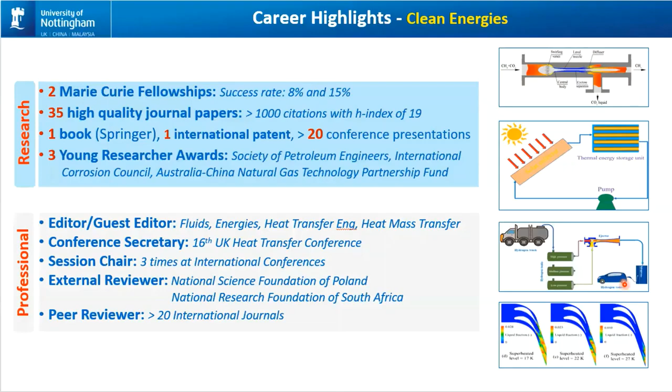Now let's have a look at the phase change material for thermal energy storage in solar-based heating systems.

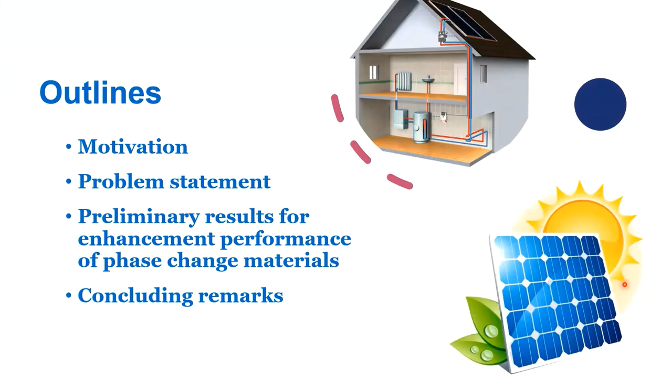As far as we know, climate change is one of the main concerns for our current society, not only for our academic colleagues, but also for the general public. Extreme weather is becoming more and more frequent in recent years. For example, we had floods in Europe and China this July.

To combat climate change, on one hand we need to develop new technologies for the sustainable development of fossil energies. On the other hand, we need to increase the utilization of renewable energies, including wind energy, solar energy, hydrogen, geothermal, and so on.

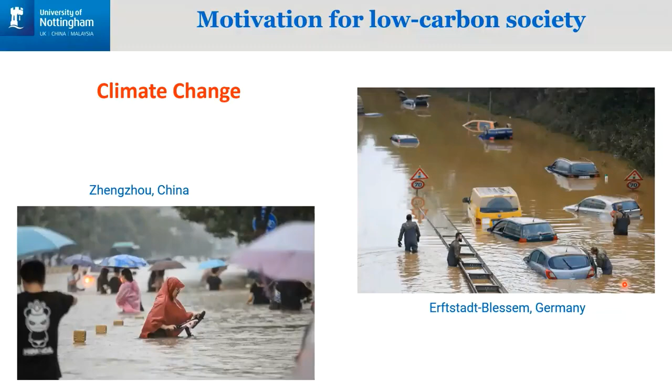This figure shows the CO2 emissions from different sectors in the UK, and we can see that emissions from homes and communities rank in the top three in the UK. For this purpose, we have to develop and increase renewable energy to mitigate CO2 emissions from our buildings.

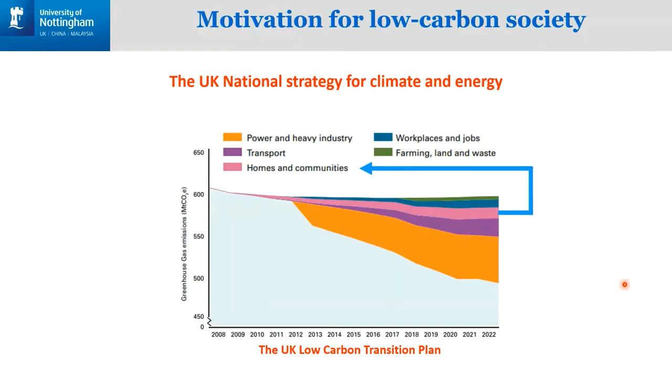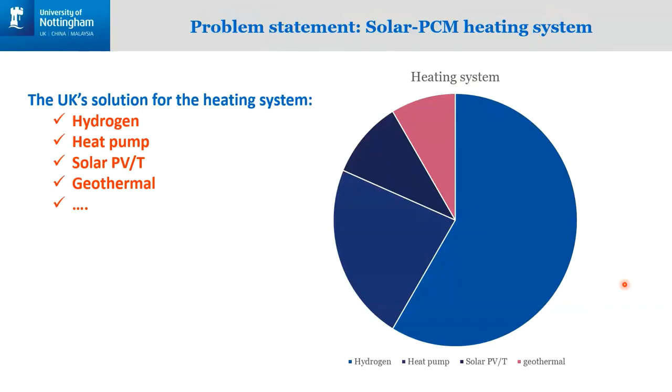For the UK, we have the following solutions for heating and cooling systems. For example, we will try to increase the utilization of hydrogen, heat pumps, solar, geothermal, and other new technologies. For this purpose, we try to integrate phase change materials as thermal energy storage with solar energy, to upgrade the energy efficiency of the built environment. This method will not only improve the energy efficiency of the modern building environment, but also mitigate CO2 emissions from homes and communities in the UK.

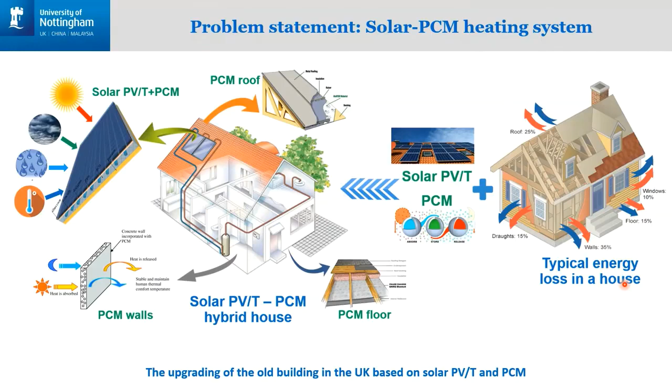In this study, we try to evaluate the performance of phase change materials in solar-based heating systems. We try to integrate this phase change material as a thermal energy storage medium to improve the energy efficiency of the building environment. But as we know, one disadvantage of phase change materials is their lower thermal conductivity. So in this study, we evaluate the integration of nanoparticles and fins to enhance the melting process of the phase change materials.

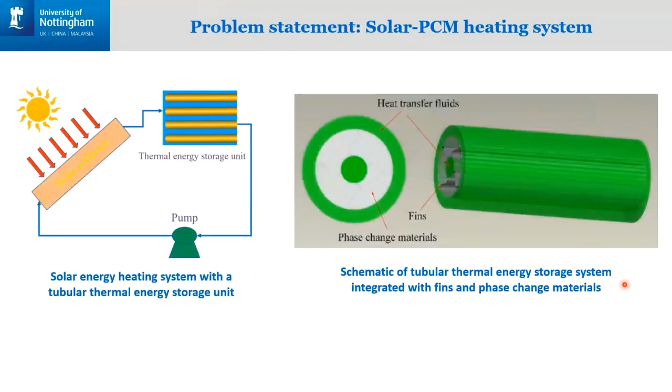For this purpose, we developed a CFD model to evaluate the enhancement of the melting process of the phase change material. For the numerical simulation, we use the conservation equations of mass, momentum, and energy to govern the flow behavior of the phase change material in the thermal energy storage system. Most importantly, we need to describe a source term related to the momentum sink due to reduced porosity in the material.

For the implementation of the numerical study, we need to describe the initial and boundary conditions for the phase change behavior of the thermal energy storage medium.

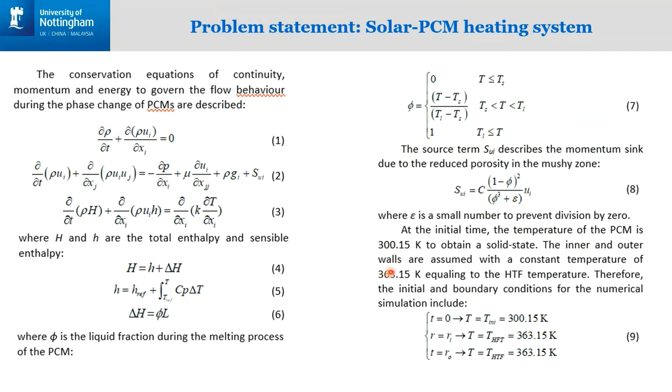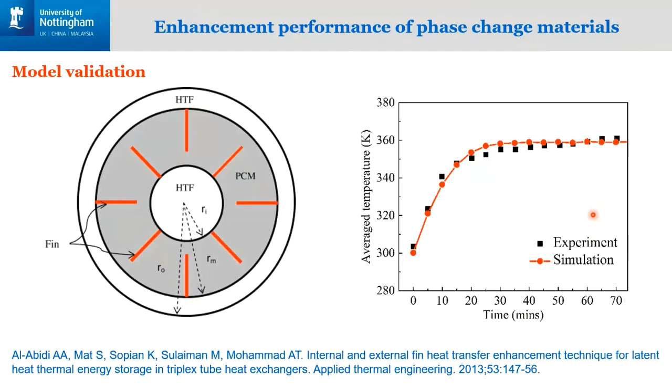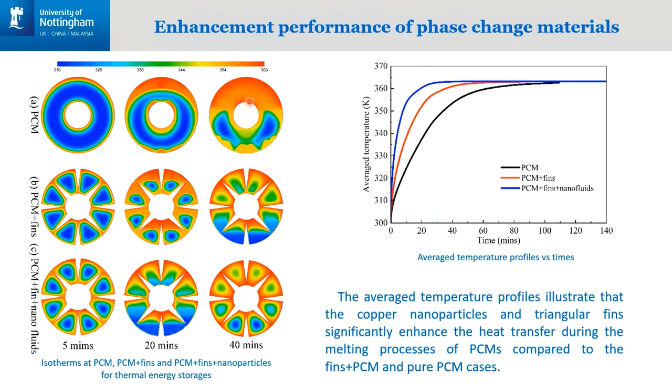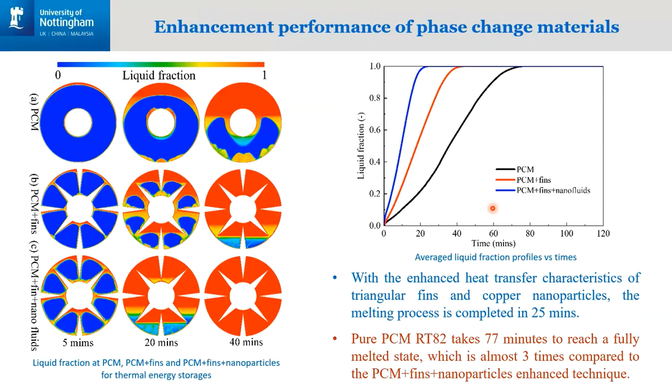Here are some concluding remarks and future studies.

In this presentation, we tried to integrate copper nanoparticles and triangular fins to enhance the melting process of the phase change material for thermal energy storage in solar energy heating systems. The integration of copper nanoparticles and triangular fins is 3 times more efficient than the pure phase change material.

In the future, we will try to figure out the flow and thermal behaviors of the nanoparticles in the phase change materials, which will be carried out in 3-dimensional numerical studies. We will also try to figure out the role of fins in enhancing melting performance of the phase change material, including their types, configurations, surface structures, and so on.